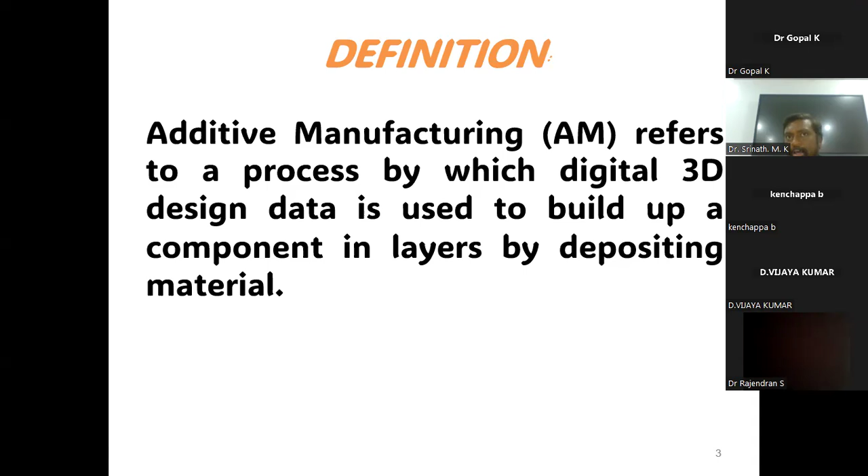So basically what we always have is 3D design data, a 3D model, a digital model, which can be modeled using various techniques or methods. After which the process is to build this particular component. How do we go about building it? As the definition states, it is a deposition of material in a layer by layer manner.

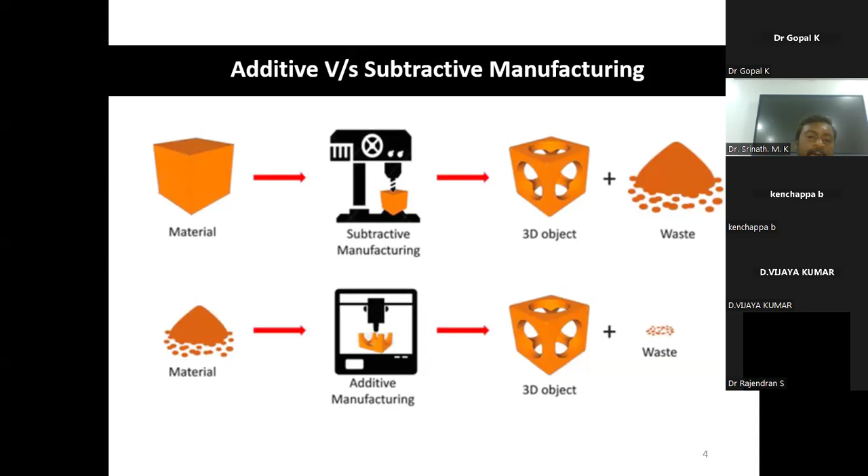Then we have subtractive manufacturing, or the various processes that it might involve - basically drilling, turning, milling, or any other finishing operations. Then we have the 3D object.

When we talk about additive manufacturing, the material need not be in a cubic or solid form at all. It can be in any form - solid, liquid, or powder. Obviously some of you would have thought solid, liquid, and gaseous, but please take that out - it's solid, liquid, and powder form.

So when this material, which can be in any of these forms, is added in a layer by layer or step by step manner, eventually the 3D object is finally obtained.

Now, using subtractive manufacturing or additive manufacturing, the 3D object obtained is the same. However, when we observe the waste, there's a vast difference - the waste obtained in subtractive manufacturing is very high, whereas the waste obtained in additive manufacturing is very low. So this is one of the bigger advantages. Of course, there are other advantages too, but the basic understanding is: in subtractive manufacturing the final object is obtained from the main object by removing material, whereas in additive manufacturing the final object is obtained by adding material in a layer by layer manner.

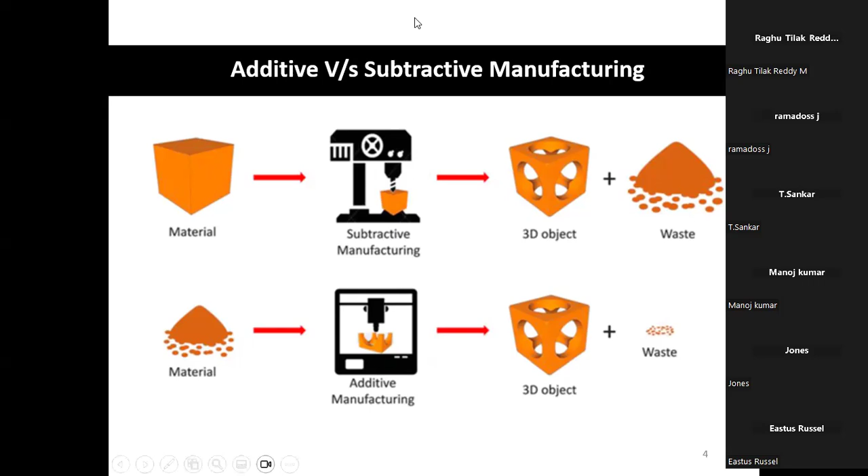So as I was just telling you, what is additive manufacturing? Additive manufacturing is a technology which can manufacture any component. What does 'any component' mean? Literally, it means any component only. There is no holding back in additive manufacturing - it can literally manufacture any component. I believe some of you may have read an article of late.

What could be these constraints imposed by conventional manufacturing techniques? Now if we talk about conventional manufacturing techniques such as turning, milling, or drilling, what are the constraints involved there? We have the speed, we have the rate at which material is removed, and we have the depth of cut. Such constraints need not be present in our additive manufacturing technique.

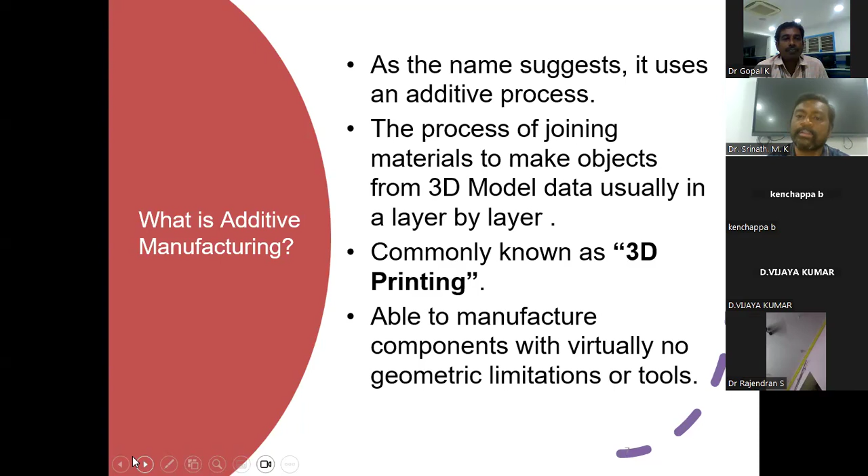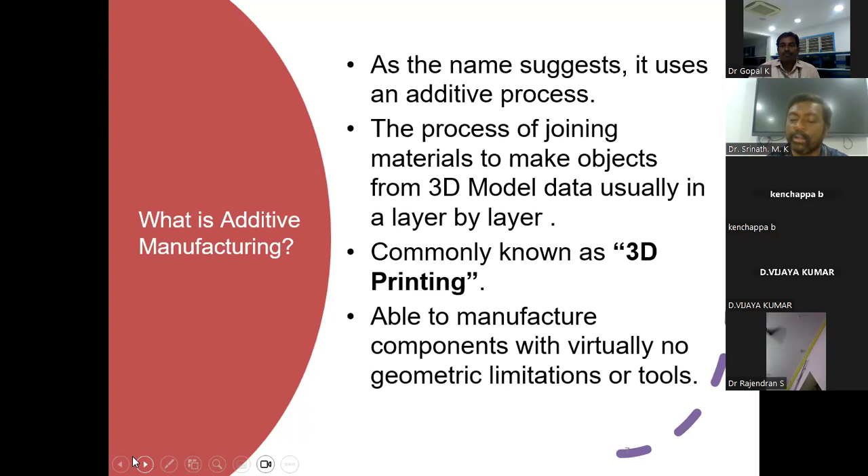But when additive manufacturing came about, it was only logical to call the others subtractive manufacturing. This process involves joining materials to make objects from 3D model data, usually in a layer by layer manner, commonly known as 3D printing, able to manufacture components with virtually no geometric limitations or tools. There are no limitations to the size, intricacies, or complexities of the model. We only need a nozzle which can extrude the material and add it layer by layer. We do not use any other tools, such as cutting tools, in 3D printing or additive manufacturing.

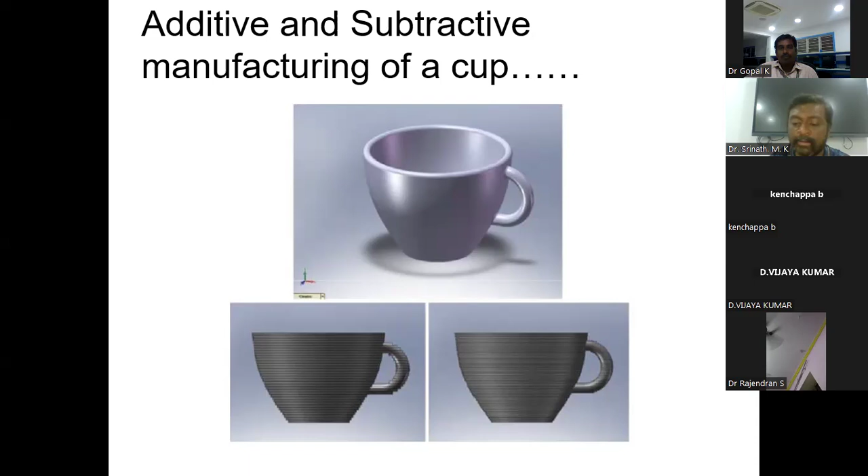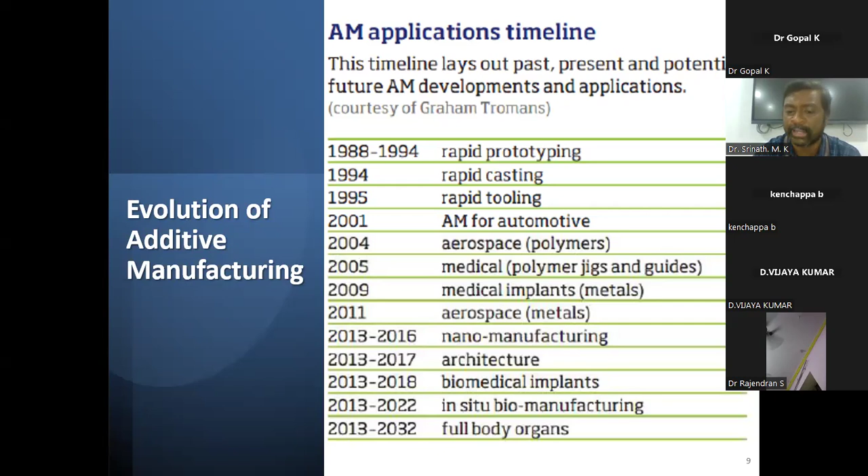Right now, only tissues are being additive manufactured. So for muscles or skin damage, additive manufactured tissues are being used. However, to the best of my knowledge, organs are not yet incorporated. I think that is most likely to happen in the next decade or so, but I'm sure it will be there. It is not far off.

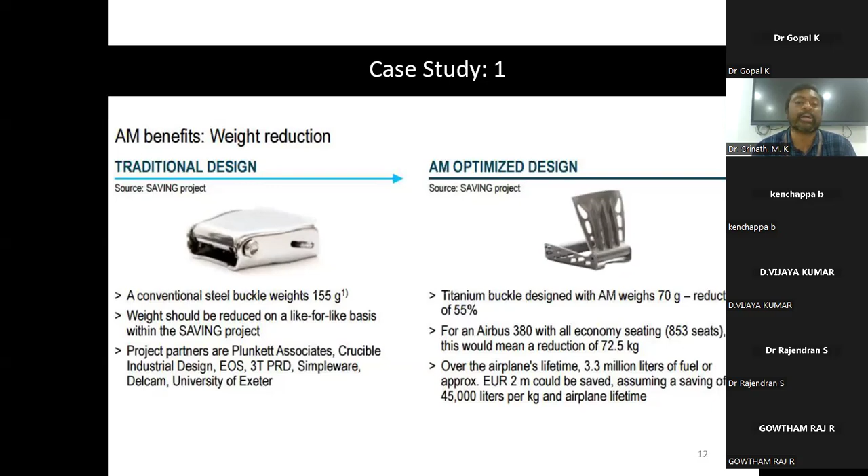Right now a lot of research has happened in this, but still a lot of research is yet to happen. I'm also doing a study on dental implants using magnesium alloys and biocompatible reinforcement to increase the strength for teeth replacement. So there's a lot of research, the field is very, very vast.

This could definitely help the patients. Of course, this is based on person to person, and individually it can be customized. I'm sure all of you know that the dental structure of every human being is not the same. So from person to person, the dental structures can be verified, and it can be improvised based on the person's dental structure.

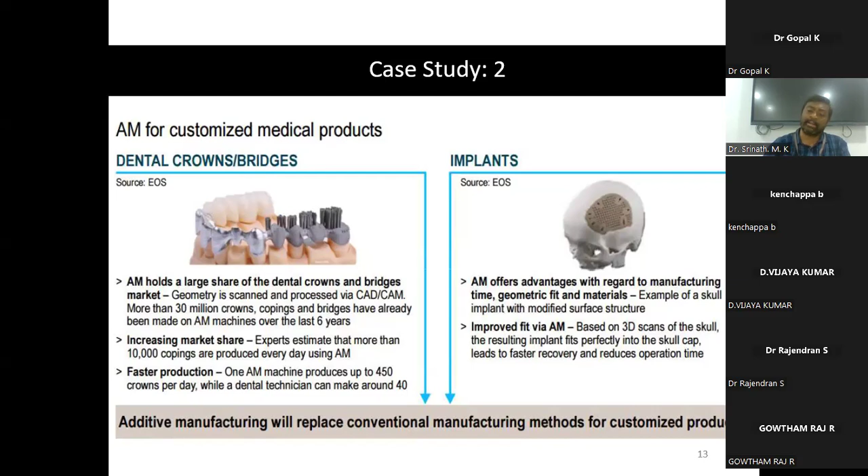So as you can see, 3D printing or additive manufacturing is very advantageous when it comes to medical fields. So far we have seen various differences between 3D printing and CNC machining.

So I think I'll just run through this. 3D printing is an additive manufacturing process and CNC machining is subtractive. CNC machine starts with a block of material, to cut away or remove the material in a step-by-step manner, whereas in additive manufacturing, the material is added.

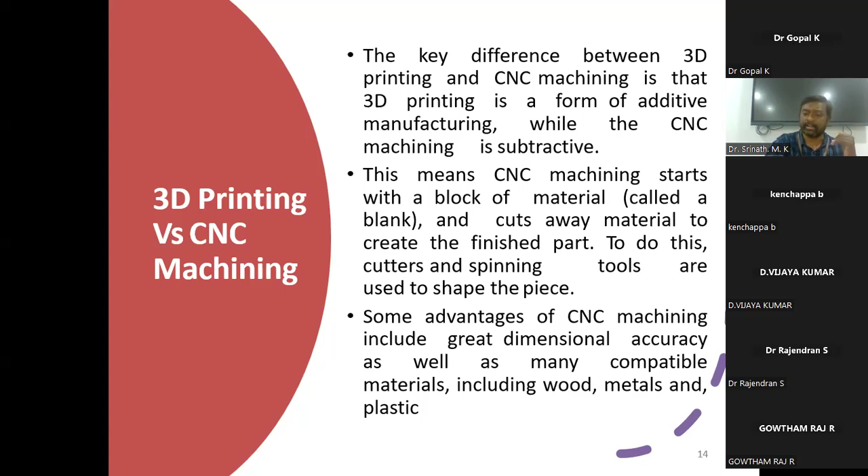3D printing and CNC are compatible with a wide variety of materials, obviously plastic, metals, even wood is also one of the materials. The most commonly used plastics include ABS, nylon, polycarbonate, PLA, PP, PMMA, PEEK.

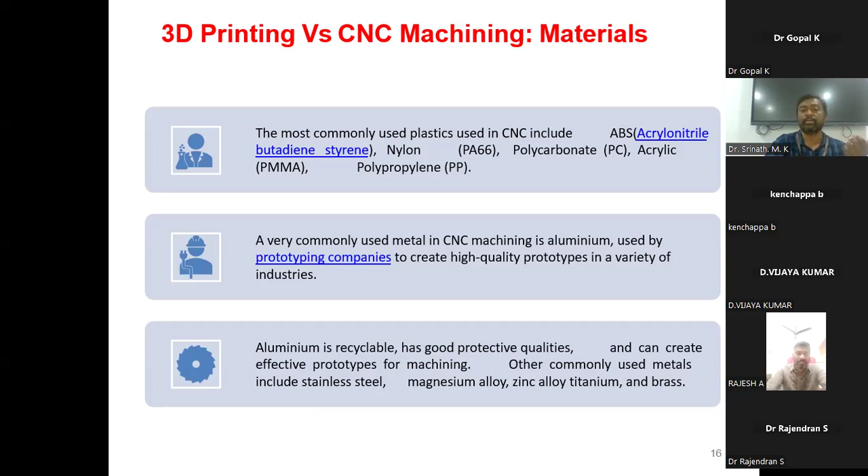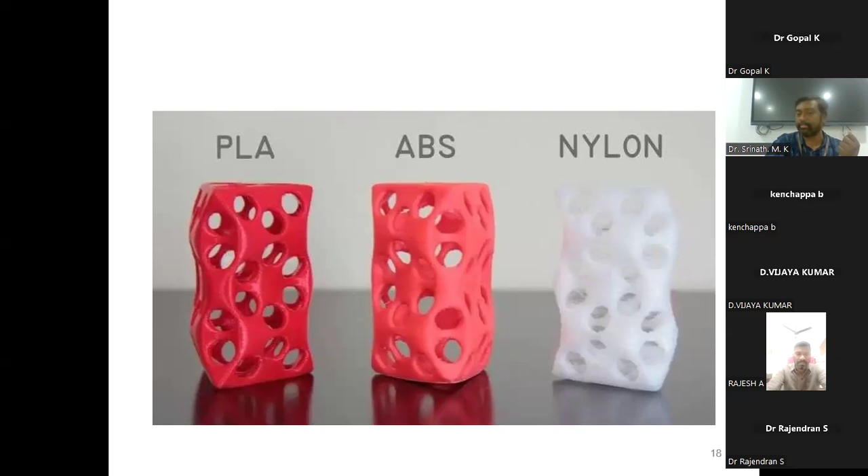These polymer materials are common even for conventional manufacturing techniques, including CNC machining. This is a comparative figure of PLA, ABS, and nylon material. A structure where any type of design can be made. Imagine if we were supposed to design this particular structure using conventional manufacturing techniques, how would it be possible? Please think it over.

Now let us get a little bit into the stages in additive manufacturing technique. I would like to give a small explanation of what are the different stages. Obviously the first one is the CAD model, then converting it to the STL file, then transferring the file to the machine setup, build, remove, post process, and applications. In this example, the first one is the CAD model, that is of a cup.

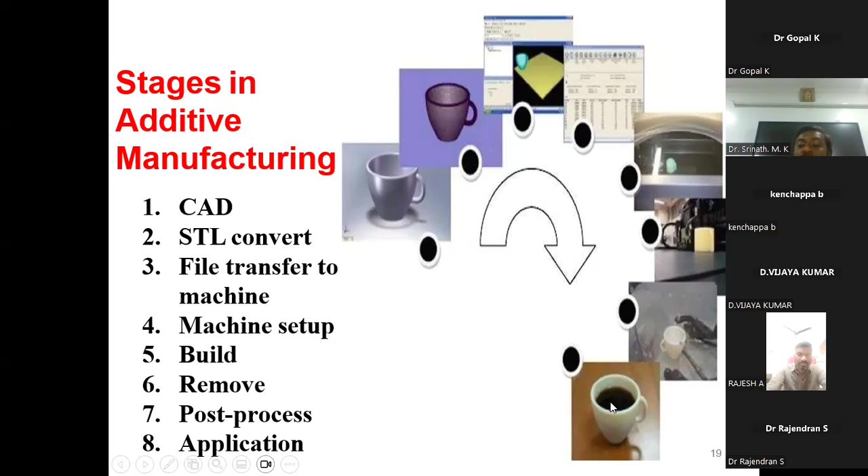Then it is converted to the STL, then the file is transferred to the machine. The machine is set up, then the material is added in a layer by layer manner. Once we get the material, it is removed and post processed to finish, for example to provide better surface roughness. And finally, application - the person here is drinking a cup of coffee or an espresso.

Step one, CAD model. All additive manufactured parts must start with a 3D model. This 3D modeling can be done using different modeling softwares such as Fusion, CATIA, Solid Edge - there are different models, where you are modeling from scratch. There is also a possibility of reverse engineering, such as laser scanning, wherein a laser scanner scans the model and eventually provides the model after it scans.

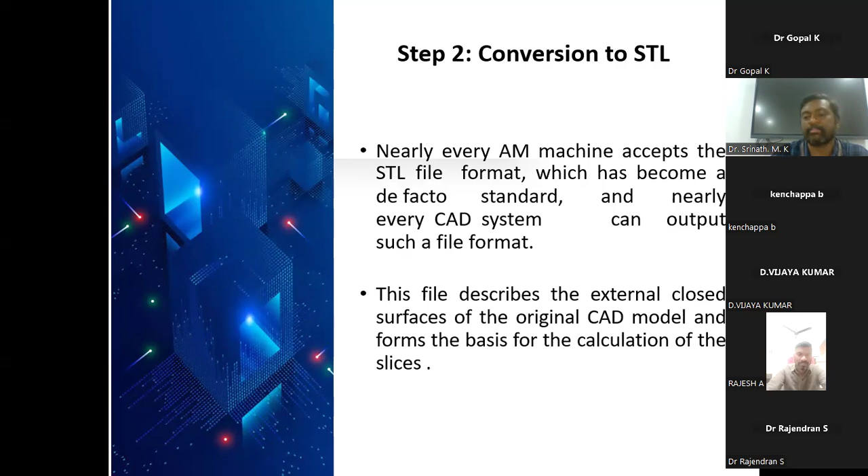Then converting it to the STL format in the necessary software - I will also be showing how the CAD model is converted to STL format and it is sliced. Slice meaning the different layers are obtained. Then transferring the STL format to the 3D printing machine, which can be done through a data cable or other modes of transferring, such as a pen drive or SD cards.

Machine setup: we provide the initial setup for the machine, what the material constraints are, what material we are using - maybe a plastic material such as PLA or any composite material, whatever it may be. Then comes layer thickness - all that will be provided in the machine setup. Build, as the name indicates, the material is built in a layer by layer manner. This does not require supervision - the material can be initiated and started, and the person need not stand there continuously to observe the build.

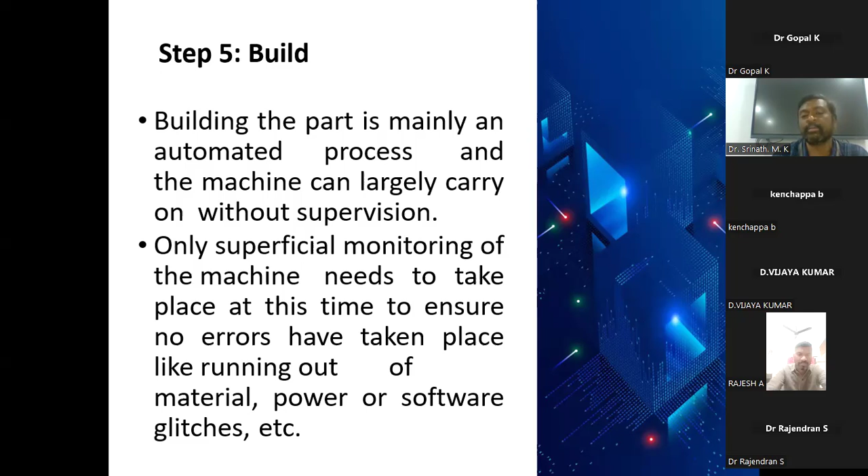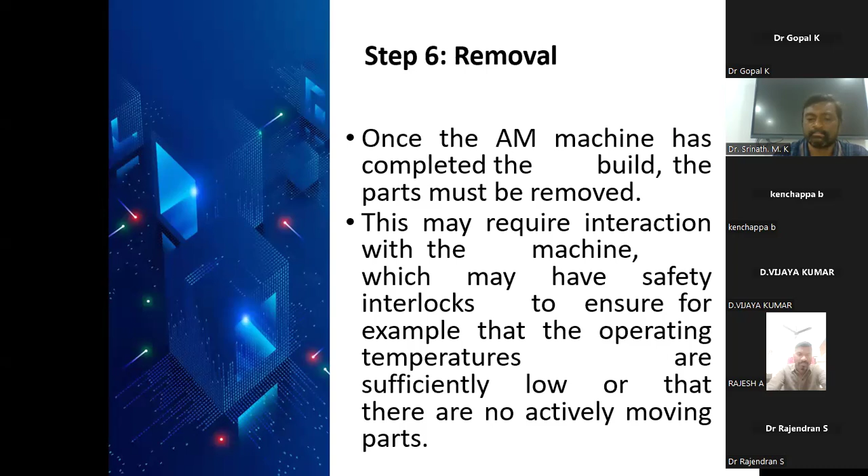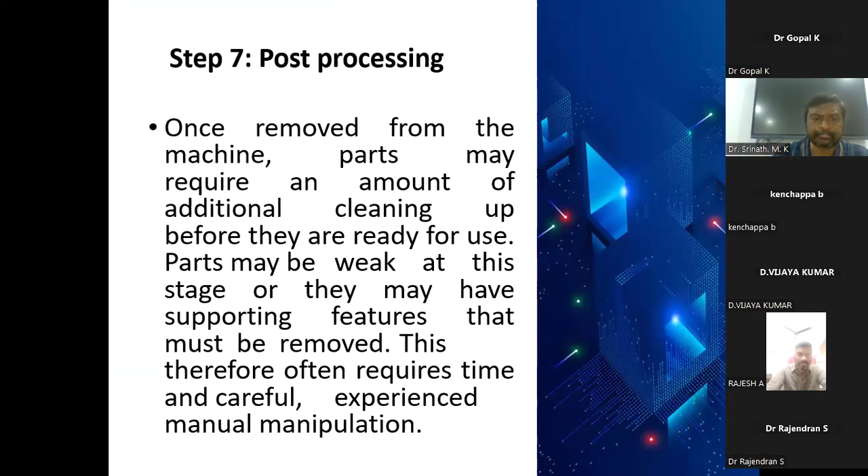But this is a must and requirement in conventional manufacturing techniques. For CNC machining, it would not really be required. Then obviously removal of the material after the component is built - we would have to remove it from the bed. Then post processing, which as I mentioned is a requirement that would vary from application to application or component to component. And finally, applications - that is where we'll apply the component.

Before I go on to the classification, I would like to show you all a small demo. Please hold on.

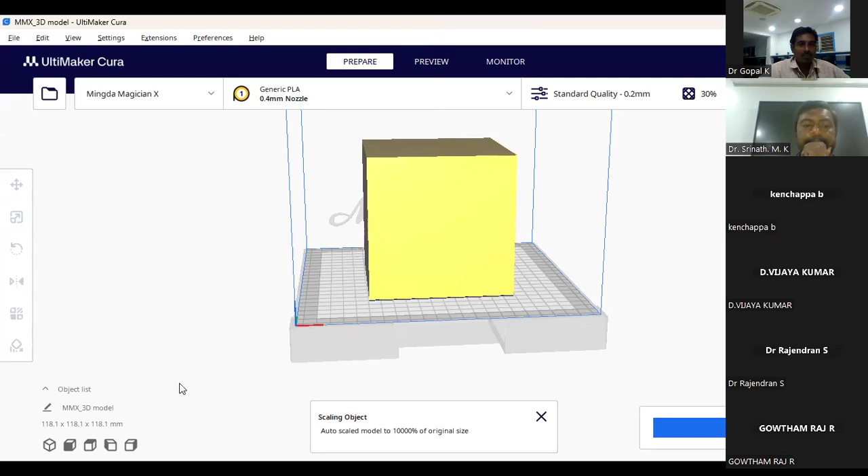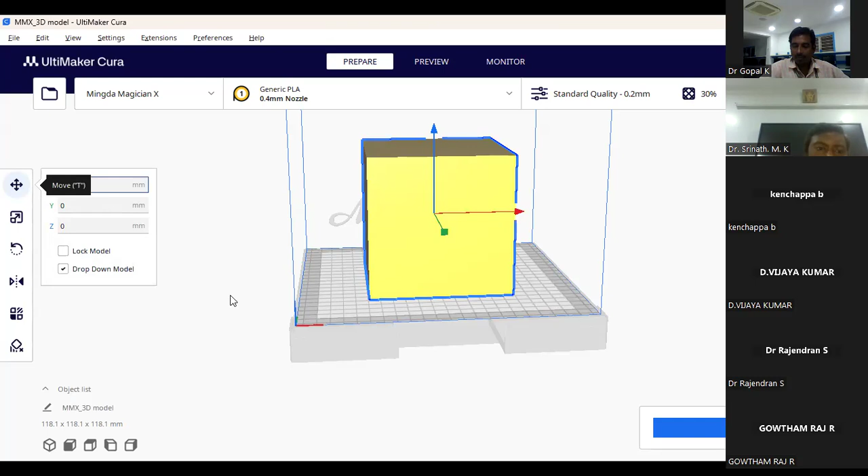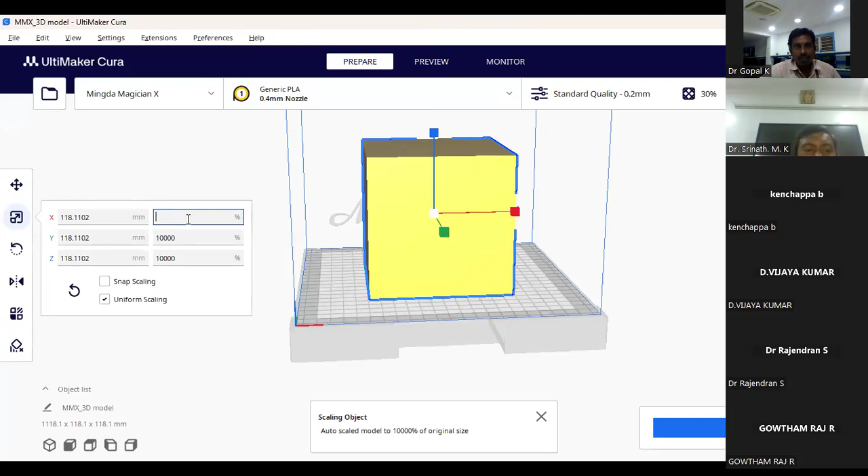Once this is done - now obviously this component, I don't want it so big, so we can reduce it to maybe, let's say, scale it down to a smaller component. So once this is done, I've reduced this component.

Now here we can see what strength we'll give. There are some components which will be required - the first one is obviously infill density. I can give 20%, 10%, 30, 40, however much we need. I'll select - there are different types of infill patterns that can be selected, such as grid, lines, triangles, cubic subdivision, octet, zigzag, cross, gyroid - different choices are available for us. Based on the strength requirement, we can select. This is a cubic pattern.

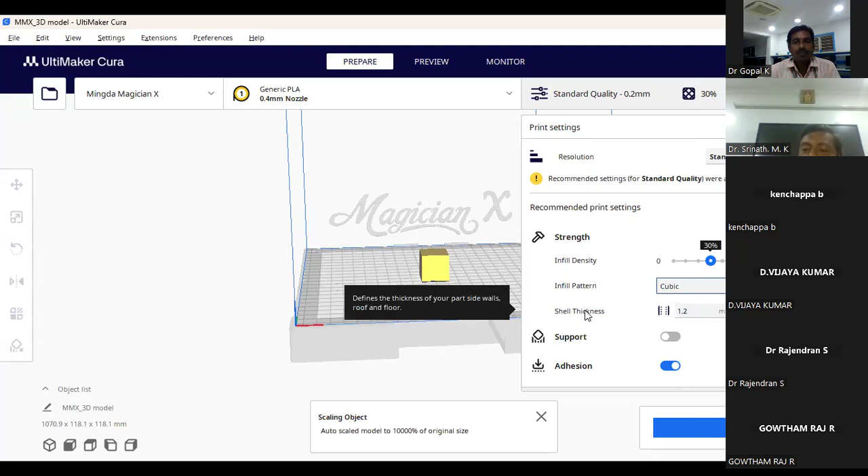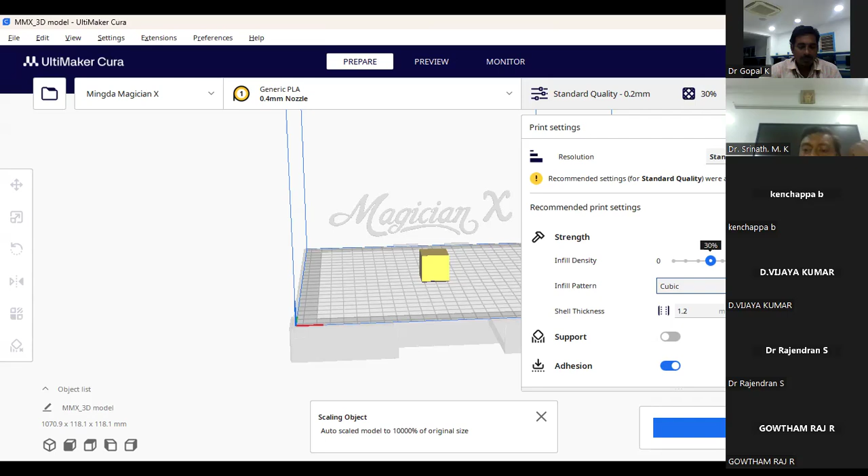So what we see over here is the shell thickness. For the side walls, it's mentioned as 1.2 mm. The shell thickness is the outer layer of the entire cube, about 1.2 mm, only on the outside. The second one is for the upper and lower layer, where the thickness is about 0.8 mm. That has been automatically selected, and I will not change that.

Then the next one over here is support. Now what exactly is the support that we generally see? In support, let's say for example I have a structure starting with a lower size and growing up to a larger side at the top. So the material has to be designed in such a way that a certain supporting structure has to be there. But since this is a cube, we do not need support structures, so we will be removing that.

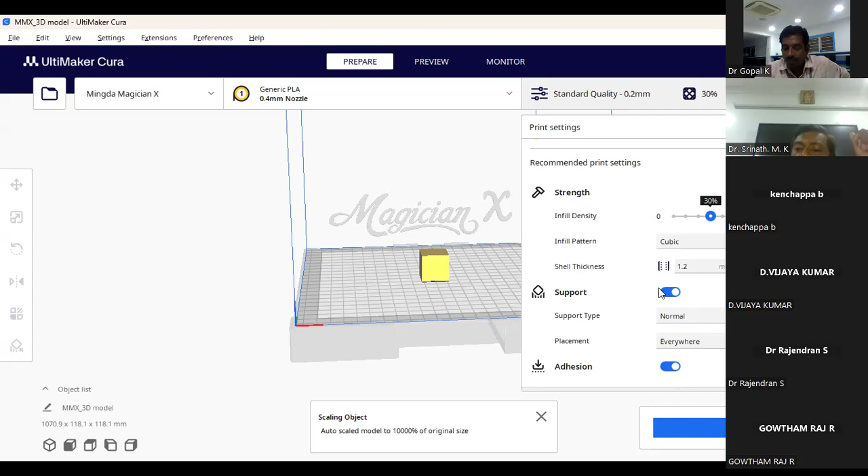And for adhesion, I'll leave that adhesion on, because I want to ensure that the cube is adhered to the bed, which is the bed of the 3D printer. Now all of them have been selected. Next I will go ahead to the slice.

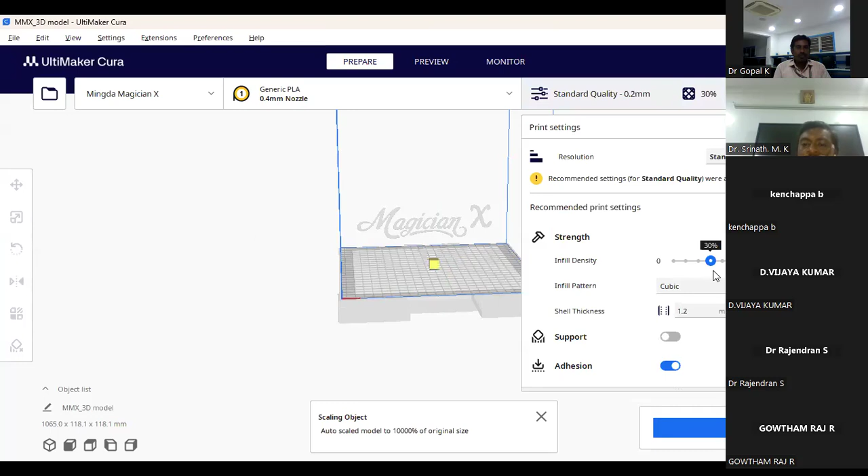The slice says 56 minutes. Obviously I'll not be able to go ahead with 56 minutes, so what I will do is reduce it to, let's say, 1,000. I'll give the same infill density, 30% cubic, and keep the rest the same, then ask it to slice again. Now it's saying 19 minutes, so 19 minutes is about 20 minutes.

Here it also shows the grams or the weight of the material, and 0.9 meters, which is the length of the filament we are going to use. So we will save this to the disk. I can save it now.

Go to that, remove that. Yes. I'll save it to my removable disk over here. Yeah, it is saved. The file has been saved. So I'll just switch over to my mobile, which I've also logged in on. I'll stop the screen sharing on this side.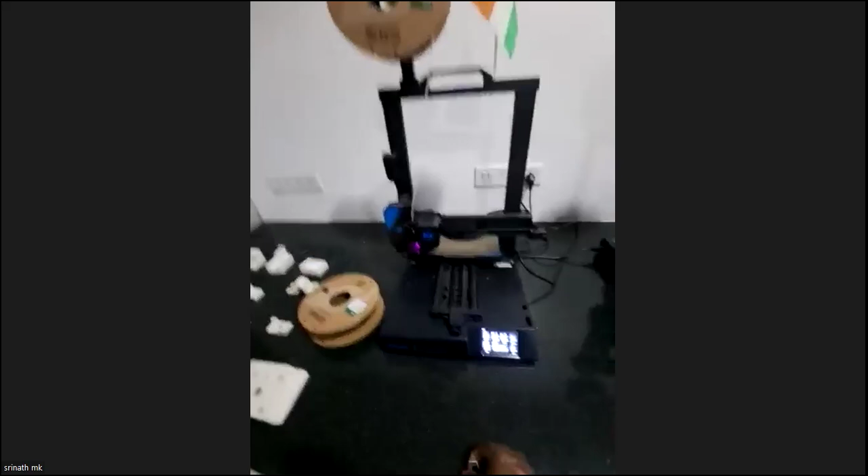So what we have here is the 3D printer. I'll insert the pen drive. I've inserted the pen drive, so directly I'll go with the print from the pen drive.

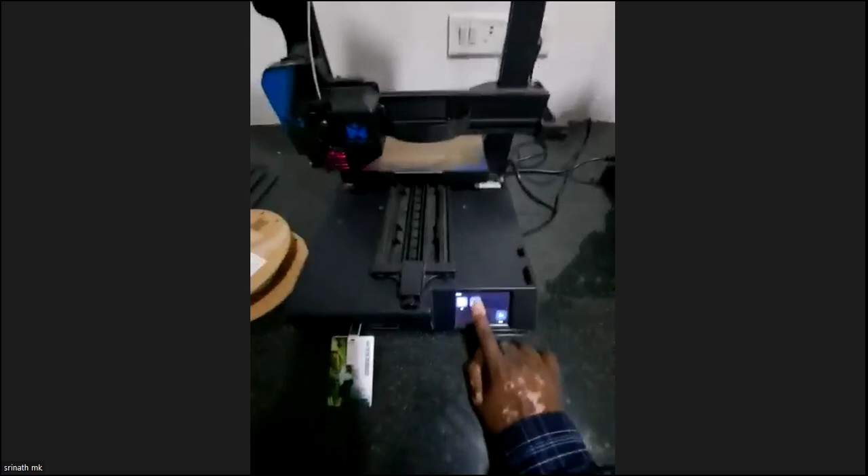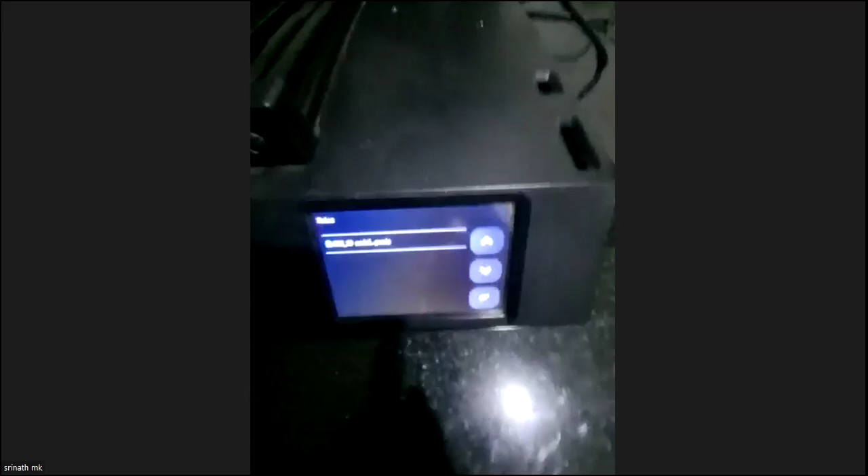So the model is already here, the G-code has been generated. As you can see over here, the G-code for the 3D model is being generated. I'll just select and confirm. The printing has been initiated.

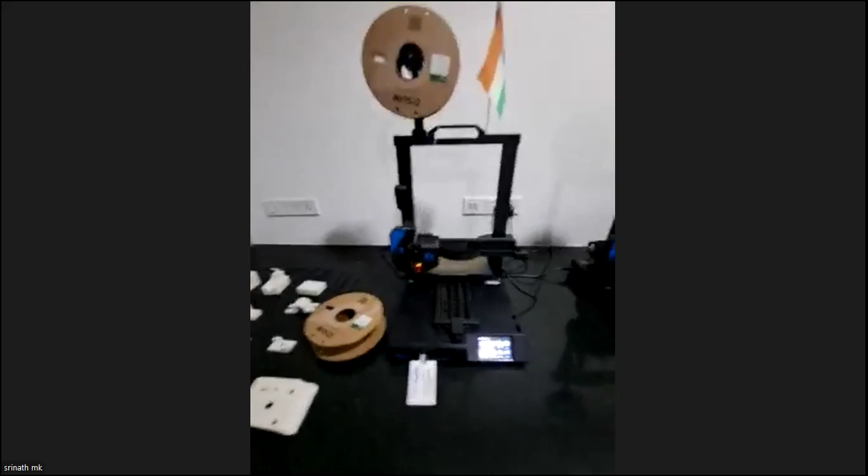The temperature needs to rise a little bit; it will take just a short duration of time. So in the meanwhile, I'd like to show you around my lab. This is one of the basic 3D printers that we have. These two I make use of for my research studies.

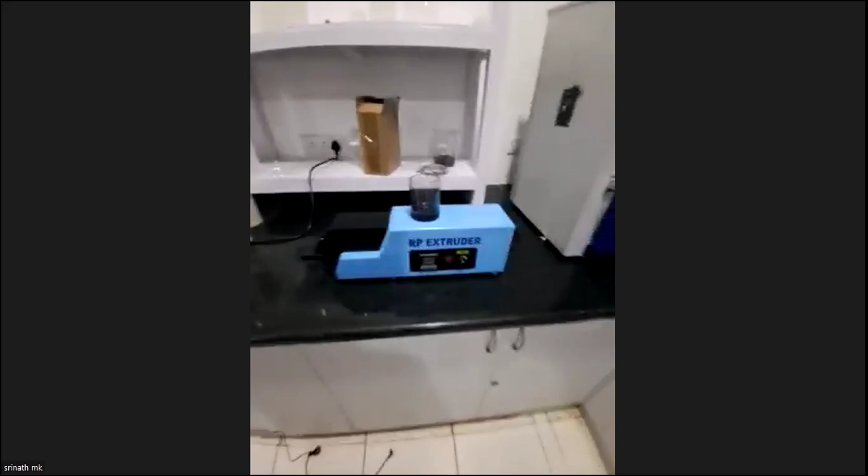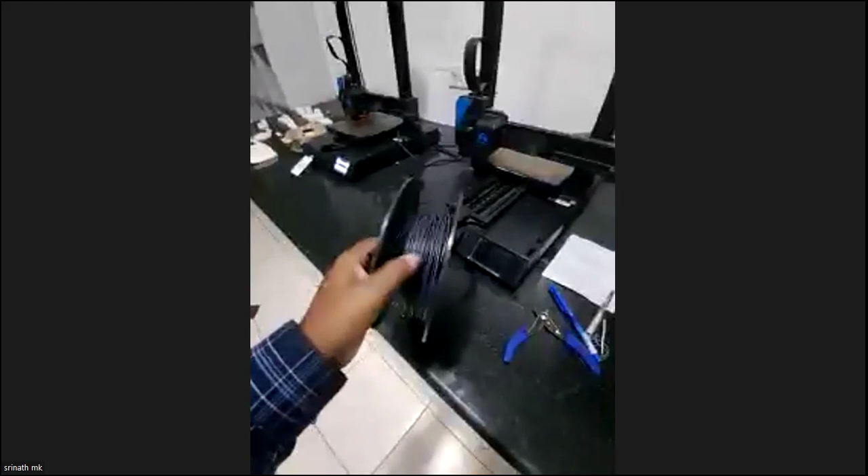Where's the PLA with CNT? This particular PLA with CNT, I have been able to extrude in my lab using the extruder machine which we have over here. We also have an RP extruder. Any kind of polymer material can be added in here, and it can be extruded out of this nozzle. Once the PLA material has been extruded, that particular component can be 3D printed.

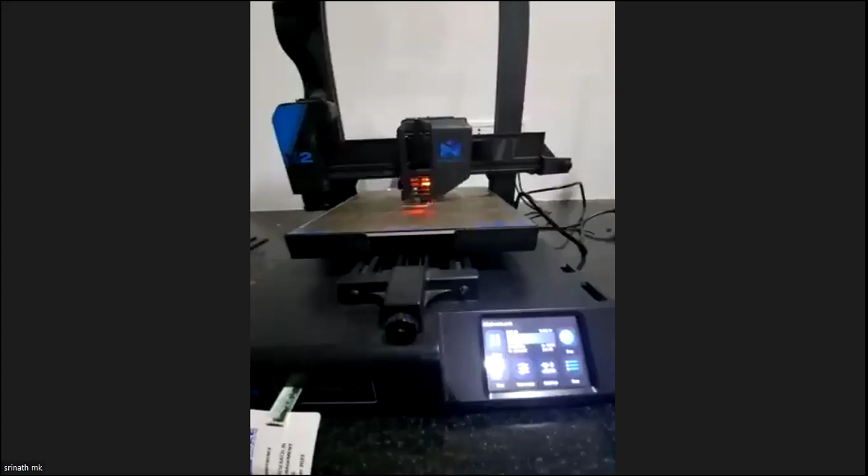Yeah, I think the machine has started. First, what it does is check the surface level. Initially, the 3D printer tends to create a bed of its sort to increase the surface adherence. So we'll leave it at that.

Here also we can see different components that we can 3D print. Some engineering models that we do for our students have also been 3D printed over here: a basic gear set, a sun and planetary arrangement, and here is a meter box reading. So such complex, intricate models can be 3D printed.

As I was telling you just a short while back, this what we see over here is a 3D printed PLA material with carbon nanotubes. This has been printed as mentioned with the nomenclature: 2% CNT, along with 30% infill density, 3 being the number of layers, and H being the hexagonal infill pattern that we have provided. So different materials and different components have been made.

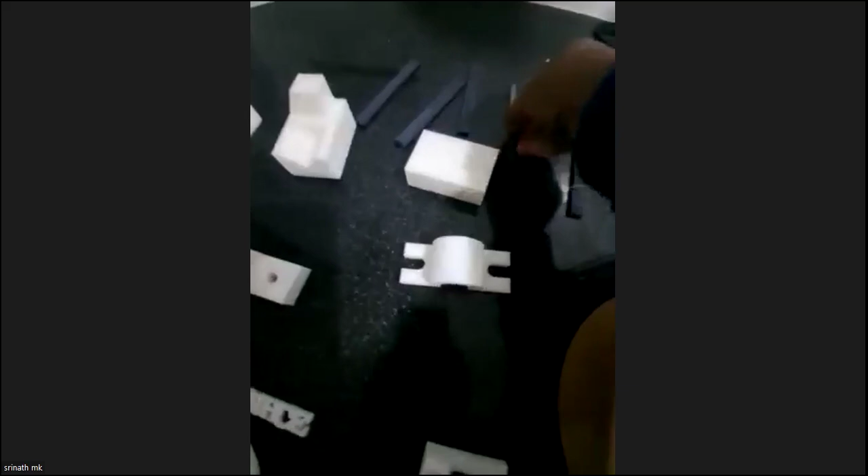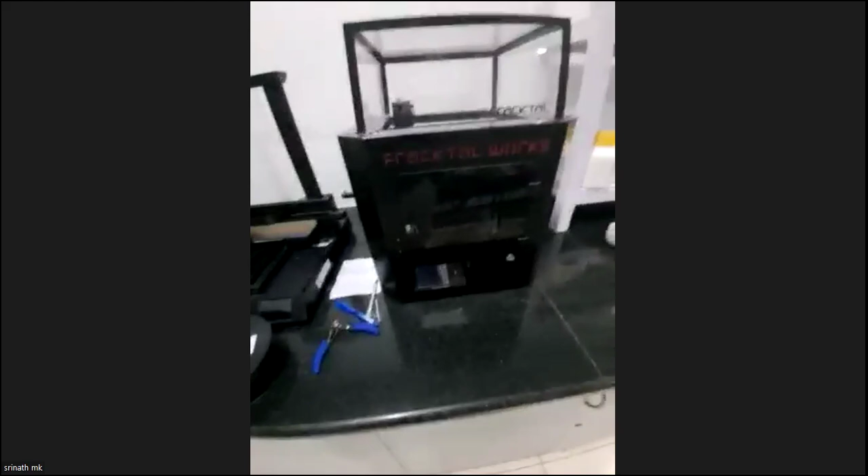So this is another 3D printer that we also have. This 3D printer has been used for higher-end research works. So these two are the basic 3D printers that we have.

Over here we have the RP extruder. The RP extruder is being used, as I told you, to extrude any kind of material. What we see over here is pellets of PLA with CNT. This process is expedited in a 2 or 3 step manner, wherein once it's extruded, the filament is cut again and added again inside the hopper. It is extruded again, and the process is continued at least 3 to 4 times, mainly because we need uniform distribution of the material.

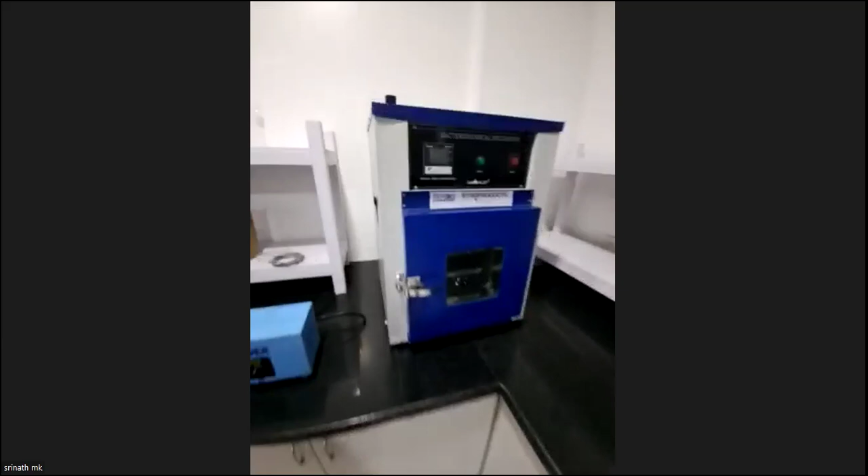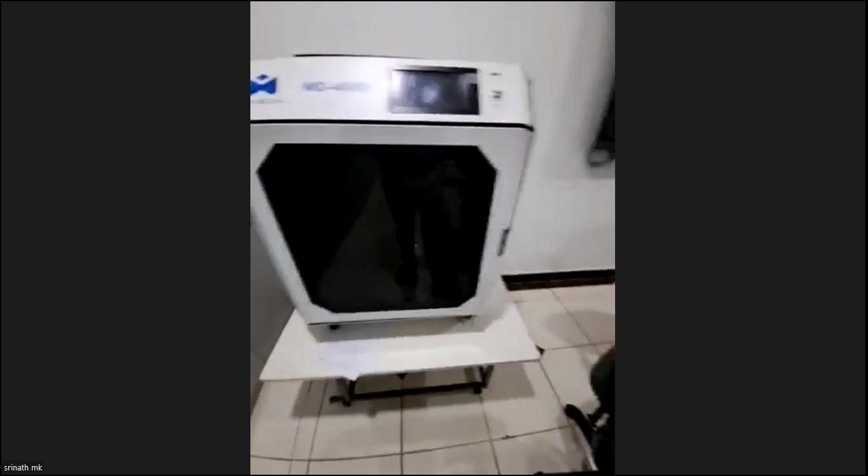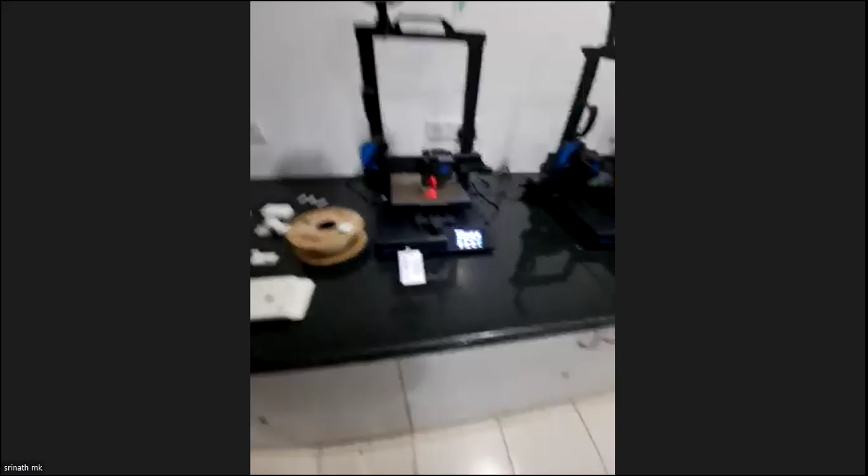Then this is the bacteriological incubator - I think this is a little off from our topic, but we do have one. And we have a very high-end 3D printer also, an MD-400D 3D printer, which cost us more than a few lakhs. This has a printing temperature of about 400 to 500 degrees Celsius. So any material with very high 3D printing temperature, such as PEEK - polyether ether ketone - which is a highly biocompatible material, and is also one of the topics of my research, that polymer material will be 3D printed using the high-end 3D printer over there. This is under process, I think we'll come back to that a little later. So let me get back to the presentation now.

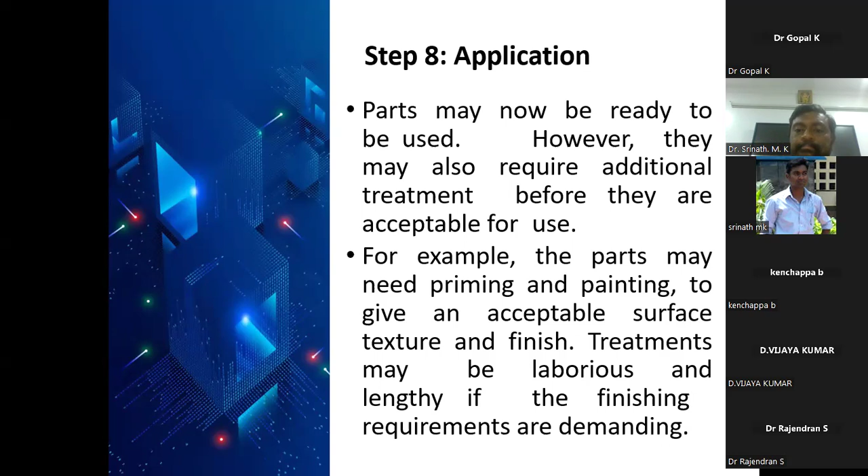Now, what are the classifications of additive manufacturing techniques? There are different classifications. The first is based on the type of material we use. The first is liquid-based material, which includes stereolithography, jetting systems, and direct light processing techniques. In solid-based, we have selective laser sintering, where a laser is passed onto the material and it is sintered - the metal is sintered and hardened, and it adheres to the previous layer, added layer by layer. Then 3D printing, then we have fused metal deposition, laser powder bed fusion, electron beam melting, selective laser melting - different techniques.

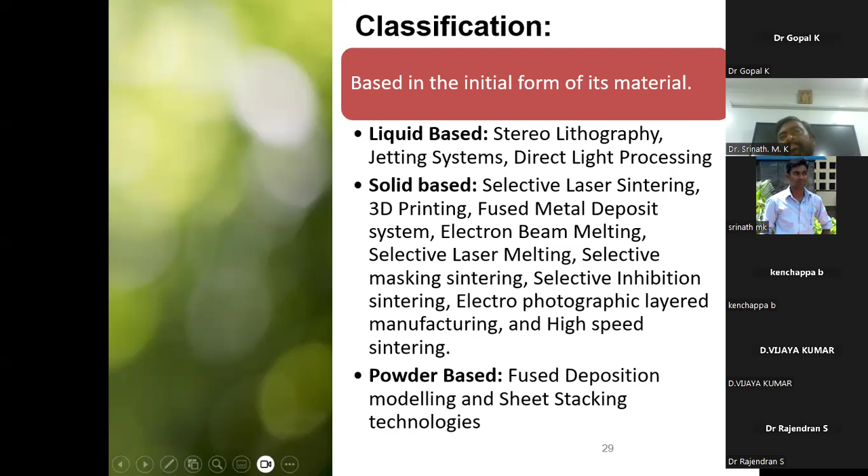When it comes to powder based, we have fused deposition modeling, what I showed you just now, and sheet stacking technologies. This fused deposition modeling can come under both solid based and powder based, so how we read it depends. I would like to discuss a little on fused deposition modeling since that is my larger interest, or my more specific interest.

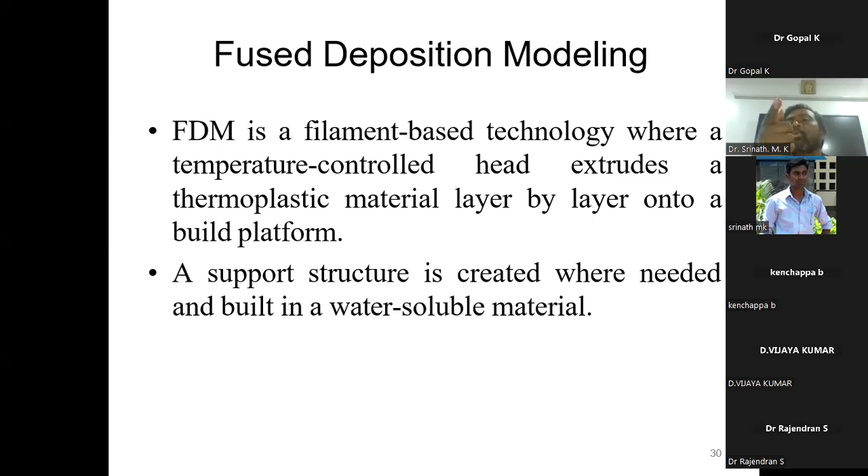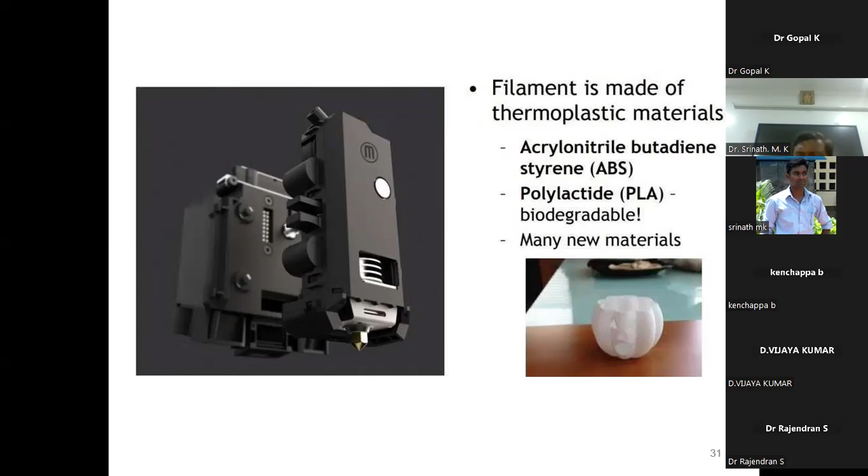As I showed you, fused deposition modeling (FDM) is a filament-based technology where a spool of material is added in a layer-by-layer manner on a platform so that the final component is obtained. It's a filament basically. In this technique, thermoplastic materials can be used - meaning materials which can be melted and go back to their hardened state. Typical materials are ABS, PLA - there are different ones. PLA is a very good biodegradable material, currently being used as one of the inserts for medical applications. Many new materials exist, but there's still a lot of research being conducted.

Then fused deposition modeling applications. So prototypes are being produced, then there are supporting structures and fixtures, and small series components, so small parts, small components, like even keychains are also being produced. So it depends on the application, the requirements of the customer.

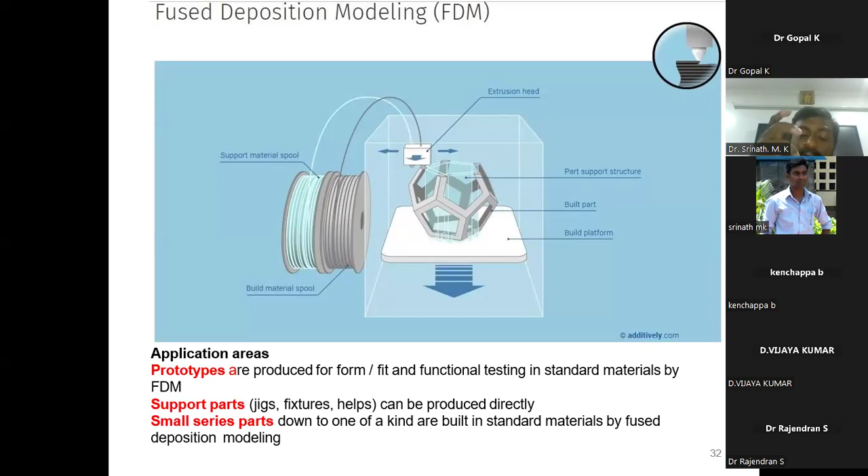Now, what exactly is the post-processing of AM parts? As I told you, many different techniques and processes can be done, many different component shapes can be done using AM. But there is something called the post-processing of additive manufacturing techniques also.

This post-processing is very much required. It depends on the applications. It could be a simple painting also, for aesthetic purpose. That is also a post-processing, right? So it is an essential stage of additive manufacturing. It is the last step where the part receives finishing touches, such as smoothing and painting.

So why is it important? The post-processing improves the quality of the parts and ensures that they meet their design specific standards as per the customer's requirements. The finishing process can enhance the part's surface characteristics, geometric accuracies, aesthetic, mechanical properties, and more. Some materials also cure to increase the strength even further. So that is also a post-processing in additive manufacturing parts.

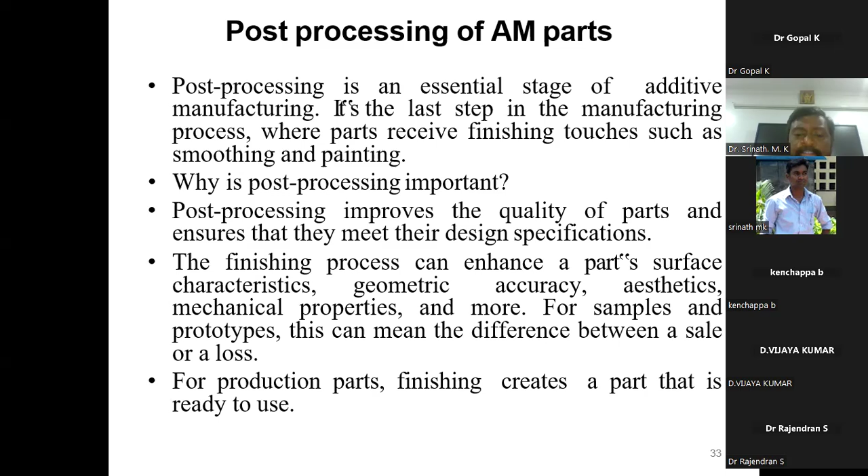So what are the different applications of AM? We talk about additive manufacturing from the application point of view. So let us look at the different applications. In rapid prototyping, food - there are many food industries and labs which have already started using additive manufacturing for food items. For example, chocolates and candies are already being done.

Then apparel. Shoes is one apparel which is also 3D manufactured. Nike is using 3D printing to manufacture football shoes for players. So that is also being done. Apparel can include even shin guards, used for any sporting events. Football players need shin guards because they need protection from the kicks they receive on the shin. So that is also 3D printed nowadays.

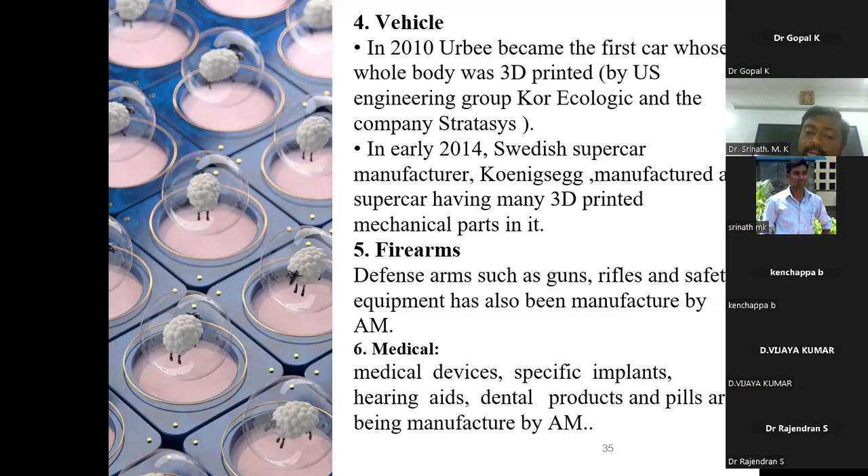So one of my colleagues is actually doing research on increasing the strength in shin guards using 3D printing technologies, using some softer materials. Then vehicles, parts of the vehicles, the dashboards, firearms, medical devices, bioprinting.

Now, this bioprinting is a very unique application of 3D printing. As I told you before, as of now 3D printing is being used for various applications, but that is only with respect to polymers and metals and other materials, with respect to aerospace, naval, automotive, or any other type of applications. But then what exactly is bioprinting? Bioprinting is where the component is 3D printed - component meaning the tissue is being 3D printed.

So what is happening is in bioprinting, the living cells are deposited on a gel medium to slowly build up into a three-dimensional structure. So as of now, to the best of my knowledge, tissues are being 3D printed and they are implanted into the human being after surgeries.

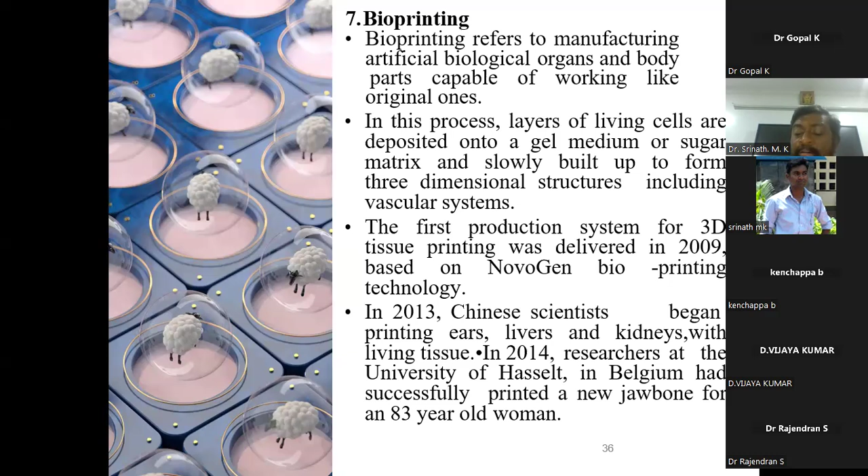But a lot of research is also being done on 3D printing of organs. So organs on a larger scale are also being 3D printed. I read an article somewhere, I'm not sure exactly where, that 3D printing of the gallbladder is also being done. It's already been achieved, and it is a perfectly functioning 3D printed gallbladder. But I cannot really provide you the details because I myself just got to know about it very late. But it is very much in research happening right now, right?

Now, obviously, SpaceX - the entire SpaceX delivered a zero gravity 3D printer to the ISS. So Mr. Elon Musk is doing a wonderful job for himself, going ahead with the SpaceX program.

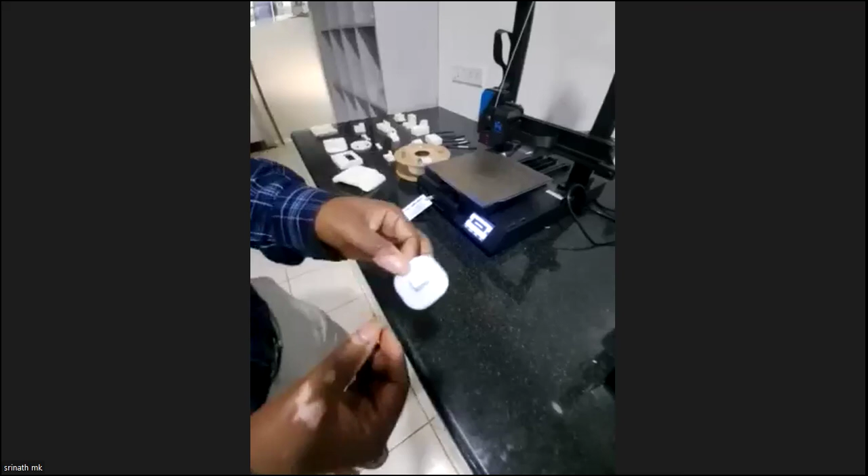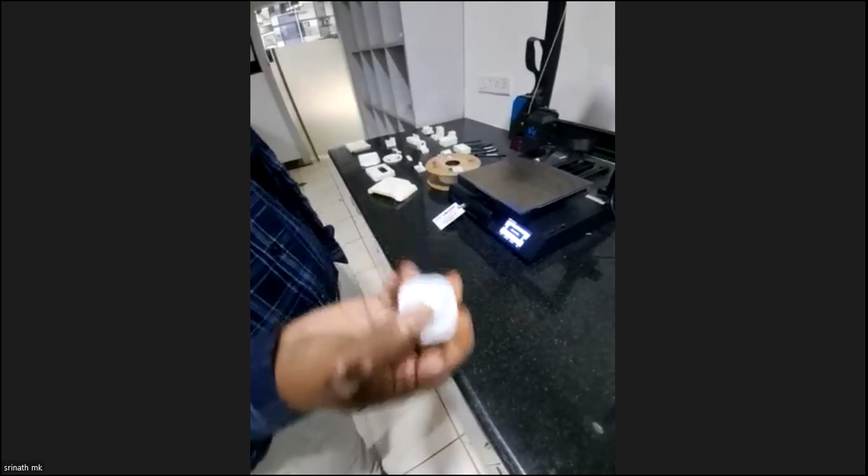What we have over here is the 3D printed component which I showed about 20 minutes back. This particular component took just 20 minutes for us to print. But imagine what would happen to a larger component like this one. This component took me almost 8 to 10 hours. Some of the components over here took even 9 or 10 hours. Obviously, this is one of the bigger lacunas in 3D printing—it's a time-consuming process.

So coming back to our 3D printed component, what we see over here is the raft. This raft is made for all the 3D printed components. It is a basic structure which is formed first to ensure that the material adheres to the bed of the 3D printer.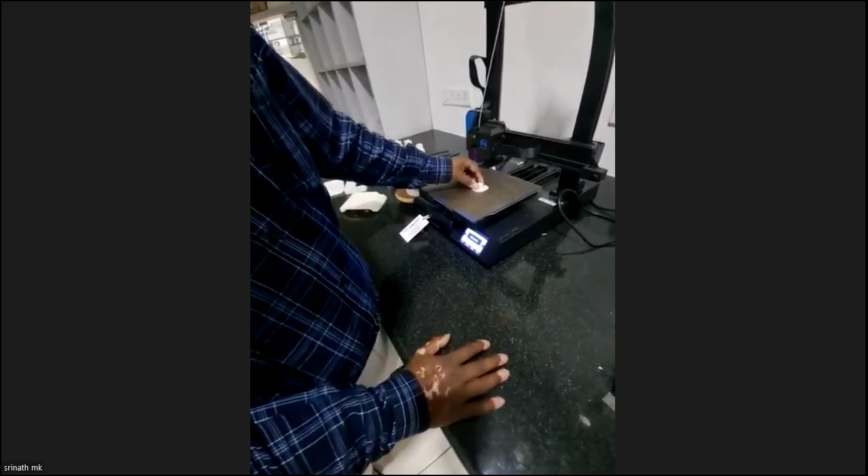If I were to give a very small component, it may not tend to adhere, because the bed also needs to heat. The bed is made warm, and it is ensured that this addition sticks to the bed and doesn't move. Even a 1 millimeter displacement from the bed will spoil the entire component. So this addition is strengthened by this bed, which is also 3D printed. Later on, this bed can be cut off, and the final component remains.

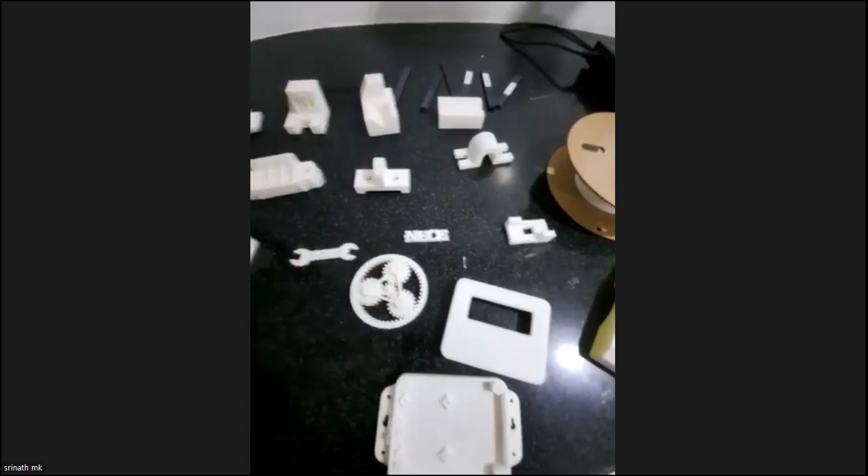So this is the 3D printed bed. We also have movable parts available, so different components can be manufactured. 3D printing is a very vast field. Multiple works can be done, multiple progress can be made.

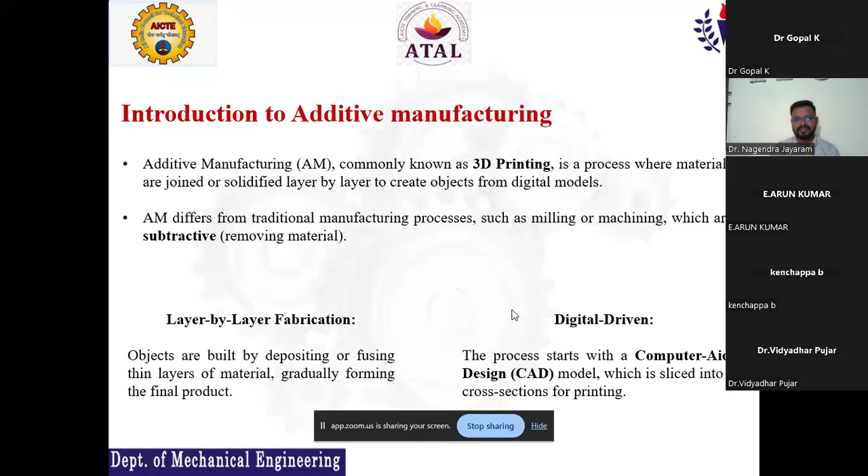And then post-processing is what has been done. Now this is what we are primarily looking into: why additive manufacturing.

Additive manufacturing is a technique wherein we build the material layer by layer, which has very minimum waste. Design complexity is slightly challenging because once we get a different overhanging product...

...the system is now able to use generative AI. Through generative AI technique, supporting structures are automatically built in order to make the model printable in any direction. That is one latest advancement.

And then speed. Right now we are at a slightly slower speed compared to traditional machining. But still, there are many different parameters now being added to the software part of the 3D printer which enable faster printing, including the cooling rate and dual extruder nozzles.

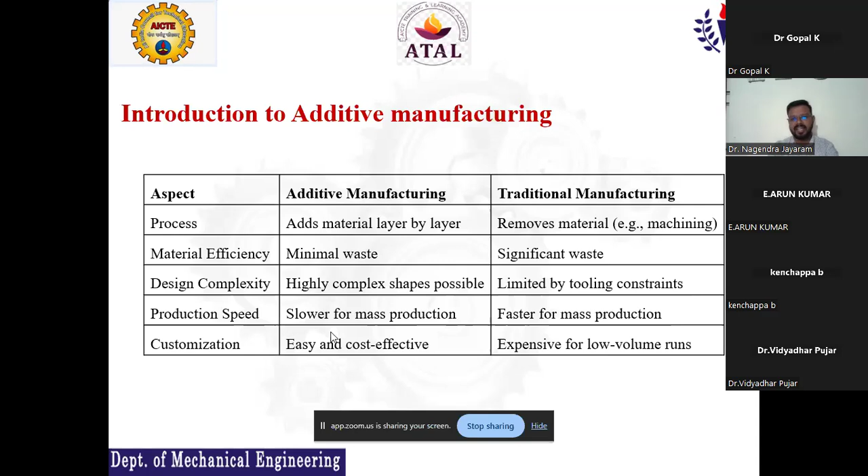With parallel printing, there are a few upcoming technologies now evolving in 3D printers. This happens to be one of the differences we get to see between additive and traditional manufacturing. Now, introduction to additive manufacturing.

So we get to see a few key important techniques which play a vital role in today's market of additive manufacturing, starting with SLA, FDM, SLS, direct metal laser sintering, binder jetting, and electron beam melting.

These techniques use different materials. The classification or laser selection for each machine completely depends on the material being processed. The lasers used for polymers are completely different from the lasers used for composites or alloys, which could be CO2 lasers or helium cadmium lasers, and other lasers now being used. So this is the primary introduction to what additive manufacturing is.

Now, the manufacturing technique starts with the design phase. That is where we get the CAD model generated, and then file preparation, which gets converted into the standard tessellation language, that is the .stl file.

And then the printer takes care of layer by layer printing after slicing, through Cura software. Post-processing is where we look into cleaning, curing, and finishing of the products. So this is the overview of additive manufacturing.